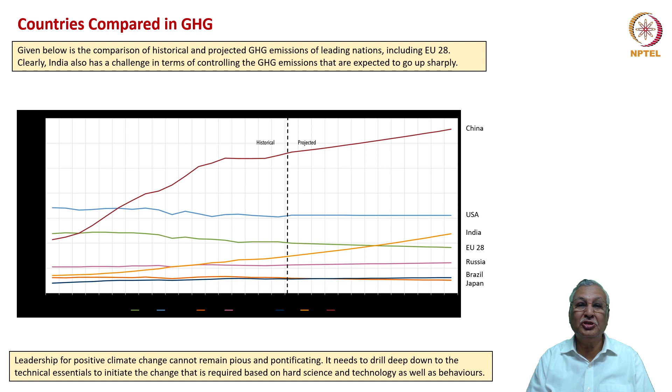This graph compares the GHG emissions of leading nations including EU28. As nations try to develop, the level of GHG emissions would increase. China is at the top of the table for greenhouse gas emissions, whereas India is also picking up its GHG emission levels. USA has always been at a high level, whereas certain other developing countries have been at lower levels. Japan, although a developed nation, has been able to maintain GHG emission levels at reasonably low levels. So this is the overall picture on GHG emissions across various classes of nations.

What is the leadership challenge? We require continuous national growth to reduce inequities. We need higher GDP, which means there should be higher industrial growth, higher infrastructural growth, higher service growth - higher economic growth has to happen.

This would happen only if you have more consumption. We also require more production to support more consumption, and we require more consumption from the people who do not have the ability to consume. The masses need more public goods, more items of necessity put in their hands for a better lifestyle.

So there is a growth trend like this, which is incumbent upon leaders of emerging markets, developing nations, countries which want to reach the top economic club. So these are the requirements.

However, this growth trend needs to be reappraised. And how do we do the reappraisal? We can do it by looking at the way the growth is taking place and the way the growth is also leading to emissions.

If you look at total emissions, we have two broad classes: CO2 emissions and non-CO2 emissions. CO2 constitutes the largest emission bloc, about 45 billion tons per year discharged into the atmosphere. Non-CO2 emissions comprise methane emissions, black carbon emissions, and nitrous oxide emissions.

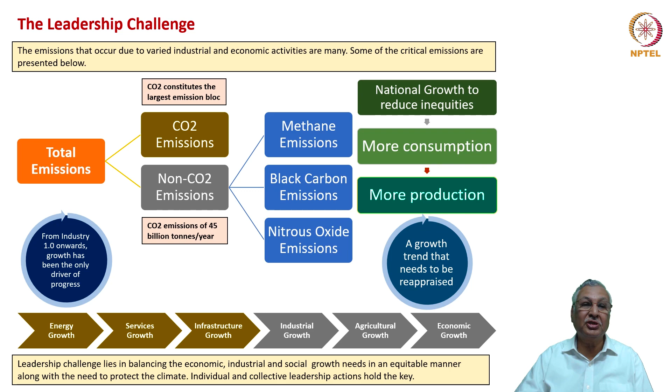If you see the value chain and the external view of an industry, the risks vary. Very few industries, if at all, have low risk with reference to the climate change situation. Most industries have moderate or high risk profiles as a result of the climate change impact.

Certain industries such as utilities, power and transport have got high risk profiles coming up due to the risk related to climate change. Similarly, the external rating agencies and regulators have got a view of certain industries, and the view is that those industries must be down-regulated in terms of their emission impact on the atmosphere.

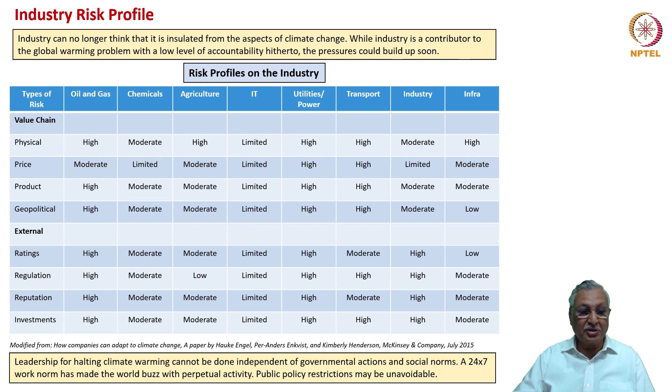There are 14 strategic industrial actions which companies and their leaders can take to ensure that they do their own bit in terms of climate leadership. These are strategic in nature, but some of them are also operational in execution.

We have to first of all dovetail with local emission goals. We need to review our HVAC systems. Leadership must be closely involved in the design of facilities. Green mobility should be a prime responsibility of leadership drive. Transportation has to be optimized. Greenhouse gases must be reduced.

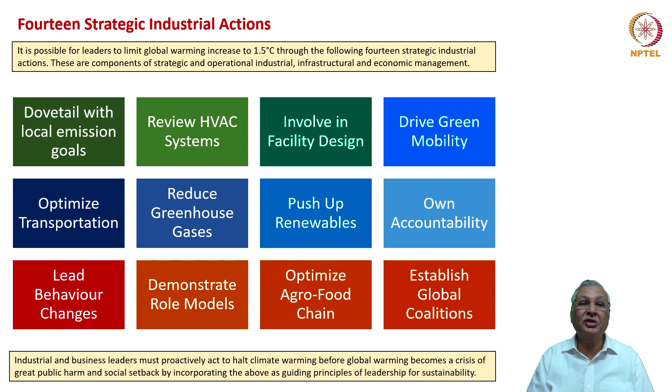Renewables should be increased. There must be ownership and accountability for industrial actions which could control emissions. Behavior changes must be demonstrated through felt leadership and role modeling. The agro-food chain must be optimized. We also need to establish global coalitions, requiring industrial and business leaders to work together with governmental leaders to take these kinds of industrial actions and, where necessary, incentivize them.

So how do we dovetail with emission goals? We need to have a goal of zero temperature increase. To be able to do that, industries must control all heat generators. We should optimize all our heat sinks, replace or modernize high power consuming units, make buildings green. We should shift to renewable power and also create an climate action committee within each firm and within each industry coalition. That is extremely important.

These may be seen to be functional decision-making activities delegated to, let's say, a project planning group or project engineering group, or to a facility administrator. But that is an erroneous view of these important aspects of controlling emission goals.

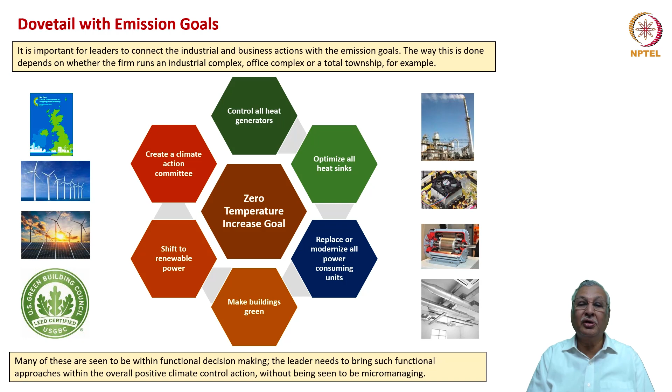Leaders need to be involved in setting a zero temperature increase goal and also demonstrating through their involvement how all of these heat minimization activities could be undertaken by a firm. You can find several companies coming forward to offer their rooftops for generation of renewable power. That is a proactive decision by company leaderships to utilize the resource they have in terms of open terraces for renewable energy production.

So coalitions are possible across the energy producing and energy consuming groups for greater good. Another important activity is HVAC, heating, ventilating, air conditioning systems. These are part and parcel of modern industrial functioning as well as modern home situations. These are a prime candidate for control of emissions. It has been established that air conditioners and other HVAC systems have a high impact on the climate, both in terms of energy drawal as well as from the refrigerants they use.

Super greenhouse gases are generated called hydrofluorocarbons. While HFCs are short-lived pollutants, they do have a strong impact on global warming, which is hundreds to thousands of times more potent than that of carbon dioxide by mass. You all must have heard about the ozone hole. Why did it happen? Because of refrigeration going up exponentially and CFCs getting released also exponentially. So the issue is very clear.

At the same time, climate change is causing the world to become warmer, so there would be more necessity for air conditioning. It is a kind of non-virtuous negative cycle. We are expected to believe that there would be 4.5 billion units of air conditioning systems by 2050 in this world, up about 3 times from the existing 1.2 billion today.

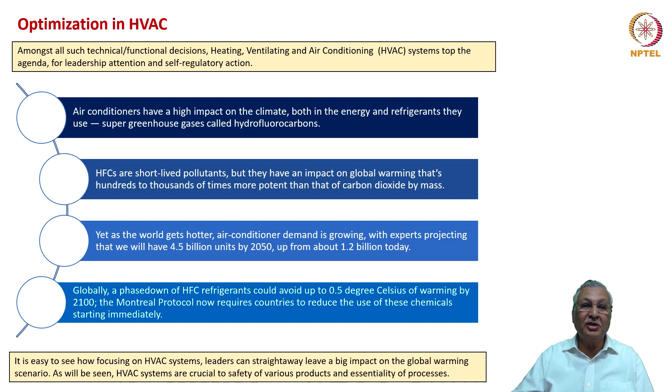Globally, a phase down of HFC refrigerants could avoid up to 0.5 degrees Celsius of warming by 2100. The Montreal Protocol now requires countries to reduce the use of these chemicals starting immediately. It is important to realize that HVAC systems offer great scope in terms of appropriate facility design and control of emissions. Many industries such as pharmaceuticals, semiconductors, cold chains, hospitals require HVAC as an essential component of their service and product lines. But how do we control the emissions that arise out of these HVAC systems?

By designing the corridors in a manner that is minimal and also functional. No point in having huge atriums, wide corridors, and high roof heights. By ensuring that material and people flow is optimized, the overall HVAC envelope along with the corridor and atrium designs can be controlled. Similarly, run the HVAC system super efficiently with appropriate air conditioners, heaters, and ventilators. Simulate HVAC systems prior to design and operate HVAC systems based on artificial intelligence so that every temperature increase can be controlled.

Enhance R&D on coolant systems and on drive systems for maximal reduction in energy and GHG emissions. Once a facility is established and operated suboptimally, it starts making a snowballing contribution to global emission. It is important for leaders to establish climate-friendly assets and operate them efficiently.

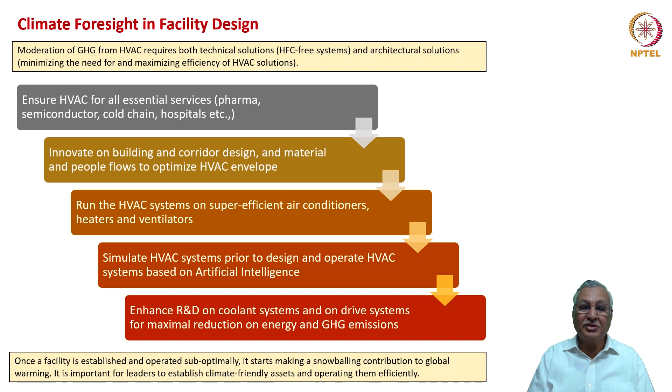Green mobility. This is another very important aspect. Transportation is the single largest contributor to atmospheric pollution and GHG emissions. We have seen in our cities how vehicle transportation leads to decline in the quality of air, causing numerous health problems for its citizens, quite apart from the impact on visibility and also hazy atmosphere and other deleterious aspects of overall climate.

Even here, China is highest in terms of the GHG emissions related to green mobility, and India is moving up. Therefore, leadership for positive climate change cannot happen with only pious statements. We need to drill deep down to the technical essentials and industrial transformation to drive the required change based on hard science and technology.

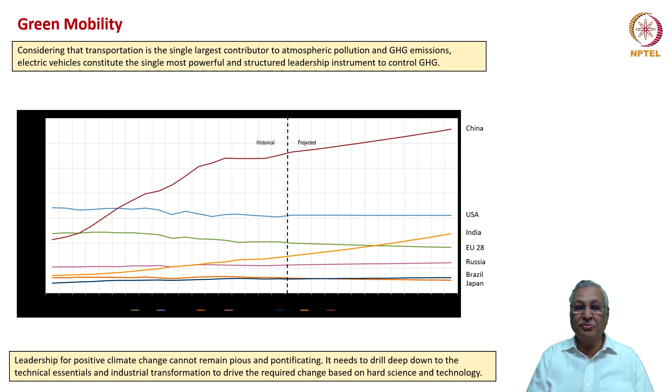Nations have begun assuming leadership in green mobility. Certain nations have started applying legislative instruments for control of IC engine driven vehicles and for encouragement of electric vehicles. United Kingdom, for example, said that national vehicle emissions should be reduced to zero by 2050, and that there should not be any sale of conventional petrol and diesel cars and vans by 2040. But just now we have the regulation from United Kingdom that there cannot be any sale of non-electric cars after 2030.

Therefore, many of these countries could advance their stipulations on introduction of electric vehicles and phasing out of IC engine based vehicles. The government of India itself started taking many proactive steps to encourage electric mobility and also focus the attention of industry as well as the consumers on the need to take on electric vehicles as a national mission.

In February 2016, the first FAME policy was formulated and then updated in 2019. The Union Minister for Transportation stated that India would like to phase out IC engine vehicles and start electrifying the automobile industry in a big way from 2030.

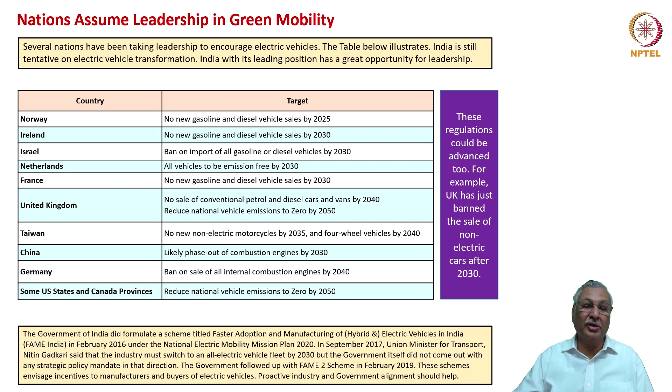However, there have been slow movements in these electrification initiatives, and it behoves our industry as well as our governments to collaborate and develop a proactive policy. We must bear in mind that India is the fourth largest in terms of automobile production, so we have a great opportunity, not just a challenge, to be a leader in electric vehicle production by adopting appropriate electric vehicle policies.

We discussed in the previous lecture in great depth how the entire ecosystem has to change if we are to bring electric vehicles in a big way into the country. There are three aspects: we have to develop electric vehicles, invest in electric vehicle movement, and transform the industry. Vehicle manufacturers, component manufacturers, material manufacturers, machine tool manufacturers, testing agencies, and power suppliers need to be closely involved. The previous lecture pointed out that many more agencies and industrial entities, as well as service entities, are involved in this transformation of the automobile industry into an electric vehicle industry.

At the same time, we also have other stakeholders - investors, banks, financial institutions on one side, and dealers, owners, users on the other side. So we need to look at the electric transformation of the automobile industry from a national perspective and come up with solutions that could be time effective, cost effective, and also supporting green mobility to the hilt.

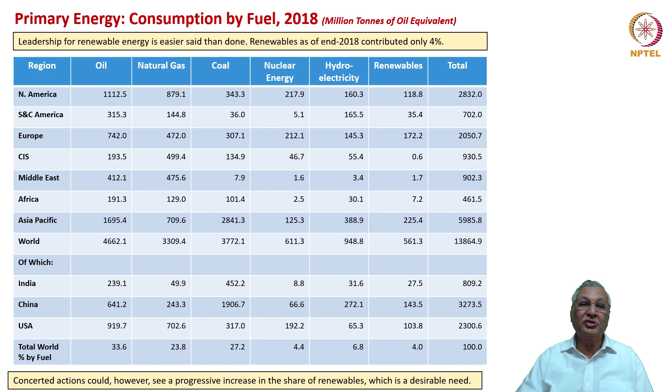This table provides a lot of data on the primary energy consumption by fuel in 2018. It is instructive that even today, renewables contribute only 4%. There is therefore a lot of ground that could be covered in substituting emission-bearing fossil fuels with renewable energies.

It cannot just be public policy. It has to be industrial policy and a mission of industrial leaders to reduce greenhouse gas emissions. We have to take cue from Japan, which has developed itself to world-class level but has been able to control greenhouse gas emissions admirably well.

Many multilateral agencies, intergovernmental agencies, and organizations such as OECD have published several reports on climate change and the control of gaseous and non-gaseous emissions. Leaders should sensitize themselves as well as their teams to the challenges of climate change and bring climate change control as part of their industrial missions.

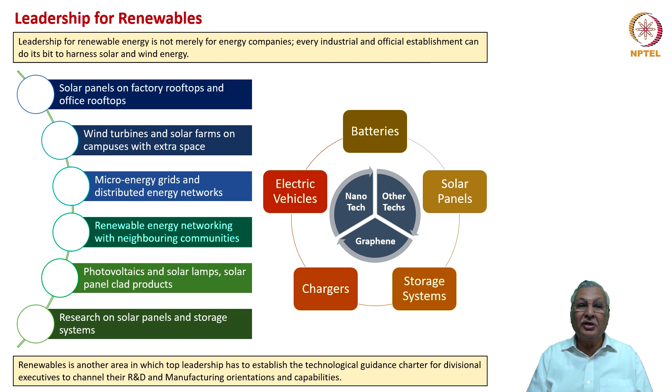So dedicated research on renewable energy generators is important. Renewables and non-renewables of course have their place. Renewables require large tracts of land for either solar farms or wind farms. They are also seasonal, sunshine or wind. Technology is in a continuous mode, so industries tend to dither a bit in getting into renewables, because once upon a time the panels were considered extremely costly. Today the panels cost has come down significantly.

Those firms which established their industries and their renewable farms based on the previous cost structures are at a disadvantage. So how do we make renewables a continuously incentivized and continuously feasible and viable option? That is the challenge. And certainly, this being the cleanest form of energy production, we all must find ways of incentivizing or moderating the renewables cost of production so that the society as a whole is benefited.

Fossil fuels being well-established technologies, they compete on the grounds of being easily available, both in terms of production technologies and from the point of view of capital goods for fossil fuel utilization, which are easily available. They can provide round the clock supply without any seasonality. And in some cases, when oil prices come down sharply, as happened when industrial output was drastically curtailed due to the pandemic, they could also be very economical.

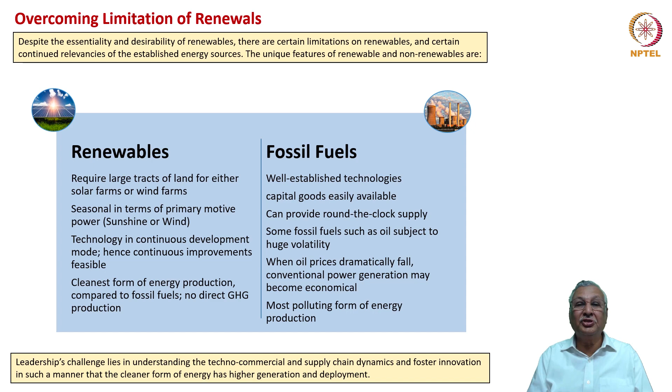Many industries use forklift trucks, for example. There used to be diesel in forklift truck usage. Today, forklift trucks can be operated through electric sources. In fact, industries should take a vow that there cannot be any diesel or fuel operated forklift truck anyway. Similarly, small level generator sets should stop using diesel generators and go in for solar energy or other types of renewable power, or techniques like the hybrid system used in cars could also be adopted. Similarly, cogeneration of energy could be considered in industries which generate a lot of heat.

So when you are trying to lead innovative solutions, there is always a dilemma as to who owns these innovative solutions and who is responsible and accountable to bring these changes. So let us look at the technology aspect.

Technology typically resides in the renewable energy companies. So the users may say, what can I do about this, because the renewable energy companies hold the aces in terms of providing appropriate technology. However, by insisting on clean technology as part of their RFQs and as part of their strategic intention to source, they can influence technological developments by the vendors.

The other viewpoint could be that reduction of GHG emissions is not my core business. My core business is to produce smart devices, computers, laptops, and various other means. Therefore, I cannot distract myself from the business objective that I have. However, companies cannot ignore the importance of having regulation, self-regulation particularly, to reduce GHG emissions, and also the advantages of having higher reputation that accrues through better emission control. And to be able to do that, a lot of climate sensitivity is required on the part of leadership and their teams.

And the third ownership question relates to investments. The facilities and equipment for GHG control are very pricey and they divert investments from the core. However, we may also consider that certain such diversions are already there. Typically in industry, about 80% of the investment takes place in manufacturing equipment and only 20% in utilities.

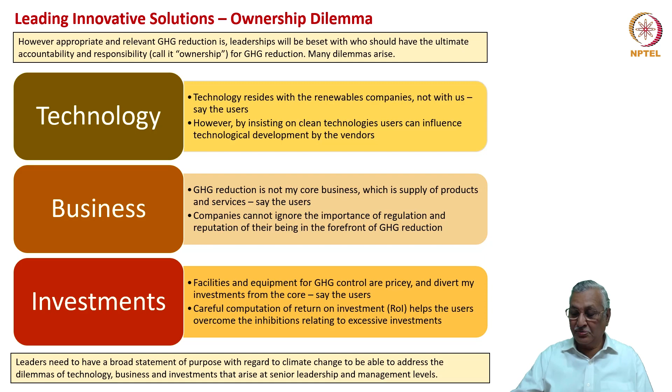The behavior change is the pivot of the green movement. If you set the thermostat just 2 degrees lower in winter and 2 degrees higher in summer, there would be huge amounts of carbon dioxide emissions saved per facility. This has been proven, and Japan as a country has always been the leader in setting higher temperatures during summer and lower temperatures during winter.

If you go to a hotel room, particularly a multi-starred hotel room, you'll find the temperature is set at 18 degrees centigrade so that guests feel cool and comfortable when they enter. This is obviously a complete misutilization of HVAC systems, and by such practices we are simply wasting energy and causing emissions. This happens because such decisions are left to people at the ground level who don't have the total appreciation of the climate change paradigm.

That's why leaders, whether a hotel general manager or the leader of an entire corporation, must take personal interest even in these small behavioral changes so that there is continuous cascading and spread of the green movement throughout the organization. The second behavioral change or mindset change is to start every leadership or town hall meeting

with a reference to climate change and the initiatives being taken by the organization to control emissions and pollution levels. The climate agenda must be the same as the safety or quality agenda as far as meetings go. Thirdly, employees must be encouraged to switch to public transportation and pooled vehicle movements as much as possible.

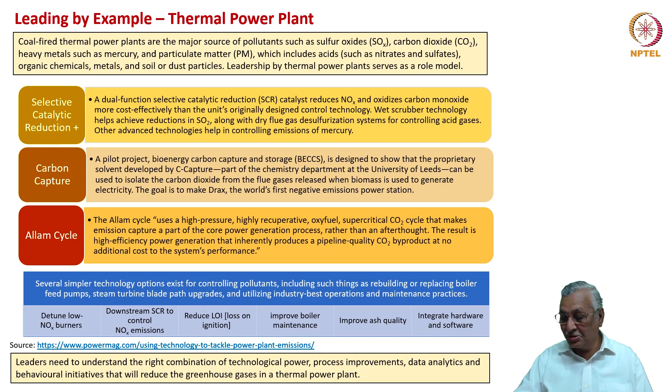Daimler-Benz has come up with a global policy of CO2 neutral fleet of new vehicles. It started saying that every vehicle they will make for the developed markets will be having CO2 neutral driving operation by 2039. It's called tank to wheel.

Battery electric series production vehicles by 2022 in all core regions has already been planned. They have premiered Fuso brand of fuel cell prototype Vision F cell at the Tokyo Motor Show in Japan. And they have started having increased activity in the hydrogen field as far as the electrification of vehicles is concerned.

They also have the goal of having CO2 neutral production plants in Europe by 2022 with all other plants to follow. Martin Daum, member of the board of management of Daimler AG, responsible for trucks and buses, has said, as Daimler Trucks and Buses, we are clearly committed to the goals of the Paris Climate Protection Agreement and thus to decarbonization of our industry. Having CO2 neutral transport on the road by 2050 is our ultimate goal.

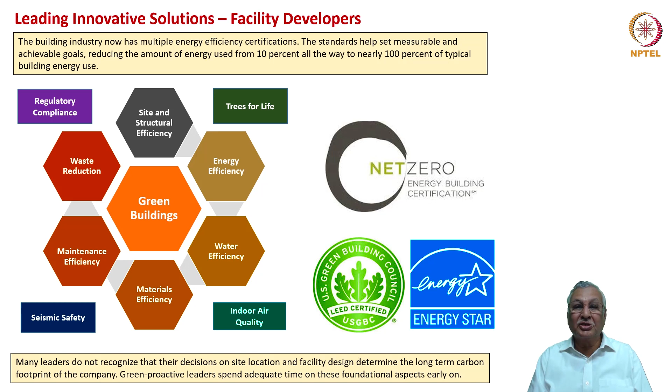Per contra, by focusing on appropriate location decisions and involving themselves in facility design, campus creation, leaders can contribute a lot to enhancing green building movement in the country. Infosys, for example, has already achieved its targets for environmental friendly buildings and campuses far ahead of the timeline it has stipulated for itself.

So to be able to do that, carbon measurement is the core of that policy. We should be able to achieve GHG emissions reduction as our primary goal, which means the company should have the ability to measure and assess the operations which are giving GHG emissions on an ongoing basis. We should deploy technology and also product and process management styles that would help carbon measurement. Green public or private procurement, carbon capture, consumption strategies—these are other collateral supportive measures so that carbon measurement can be optimized.

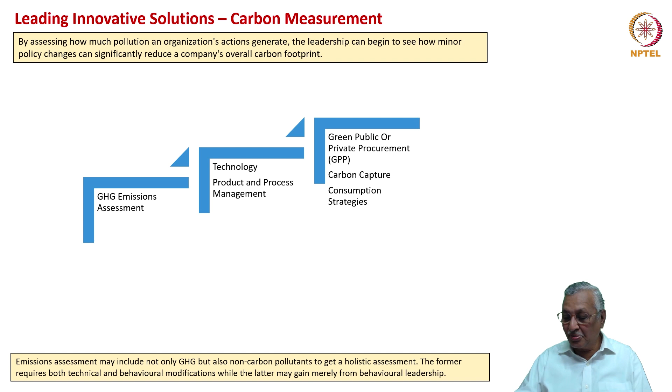There are innovative solutions such as carbon capping and voluntary offsets when a company cannot achieve carbon limits by itself. Therefore, a government entity sets a carbon cap on the emissions that can be produced, and companies are given carbon allowances. These allowances can be either used or traded to other companies in case those companies are not able to meet the carbon cap requirements.

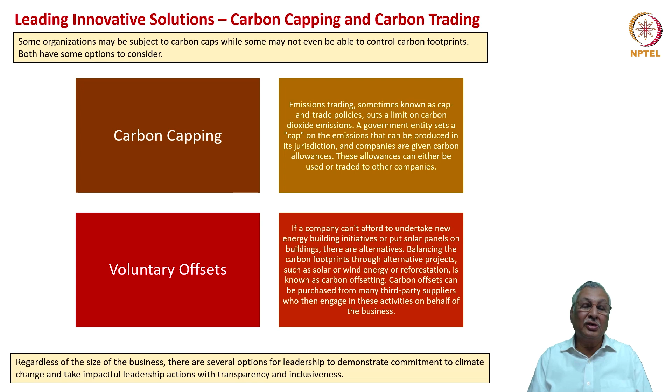Similarly, if a company cannot afford to undertake new energy building initiatives or put solar panels on buildings, there are alternatives. Balancing the carbon footprints through alternative projects such as solar or wind energy or reforestation is known as carbon offsetting. Carbon offsets can be purchased from many third-party suppliers who then engage in these activities on behalf of the business. So there is a way in which you can use your financial resources and networking flexibility to make sure that you meet the goals of carbon capping and carbon control indirectly.

Every value chain, whether agricultural or industrial, has got specific parameters for control of emissions. When you look at the agricultural value chain, which is least discussed in terms of analysis of climate goals, you will find that we have rains, seeds, land, manures, fertilizers, pesticides, and crop going together as one integrated agricultural value chain. And for each of these things, we have a metric.

If we are able to predict rainfall accurately and proactively, if we are able to get seed varieties which are hybrid and safe, if we are able to ensure adequate fertility on an ongoing basis for the agricultural land, if we ensure use of fertilizers, pesticides and manures at as low a level as possible while also assuring productivity, if we are able to get the best possible yield from a crop, the inputs required to produce the crops would automatically be reduced. And if the inputs are reduced, automatically the emissions will be reduced.

If a motor to pump out water runs for half the time, the consumption of energy is reduced and also generation of emissions is reduced. If you are able to use technology to see to what extent the land is watered at different corners through appropriate sensor technologies, or when the crops stop requiring additional water through sensor technology, you are contributing technologically to these metrics and value chain optimization.

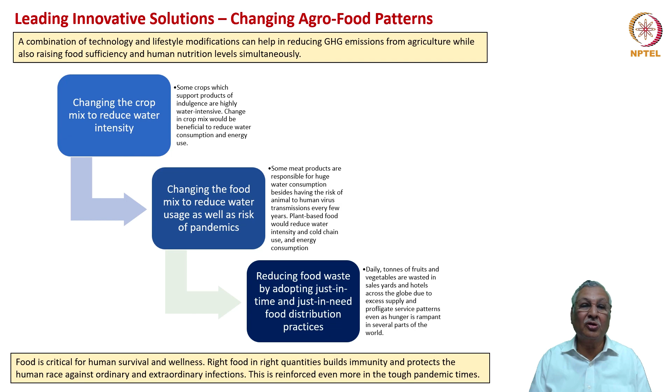Food is critical for human survival and wellness. Right food in right quantities with right quality can build immunity and protect the human race against ordinary and extraordinary infections, and this is reinforced even more in tough pandemic times. It is time that we got a behavioral mindset change in respect of food items and also in respect of technologies that could be used productively in the agricultural sector.

It would be necessary for Indian firms and industries to establish one or two apex planning and execution groups within the industrial management of the company so that there could be similar climate protection initiatives. If business leadership starts taking up climate control seriously at the unit level, the benefits would only cascade up to the overall industrial community and also to the economy itself. For that, we need sound business metrics which measure various aspects of emission as well as emission control.